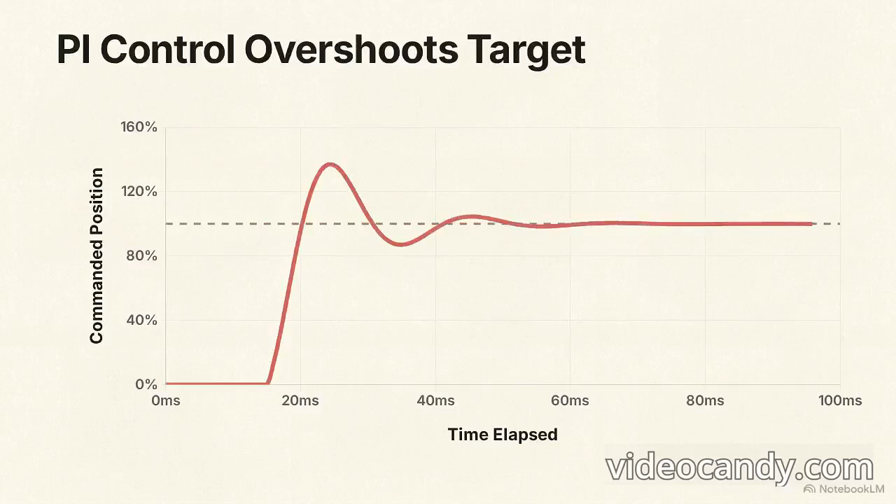When a high-speed robotic actuator is commanded to stop, standard proportional integral control typically causes the system to either overshoot its target or require time to settle. Achieving a sub-microsecond settling time, where the system snaps perfectly still without vibrating, is often considered a violation of physical control limits.

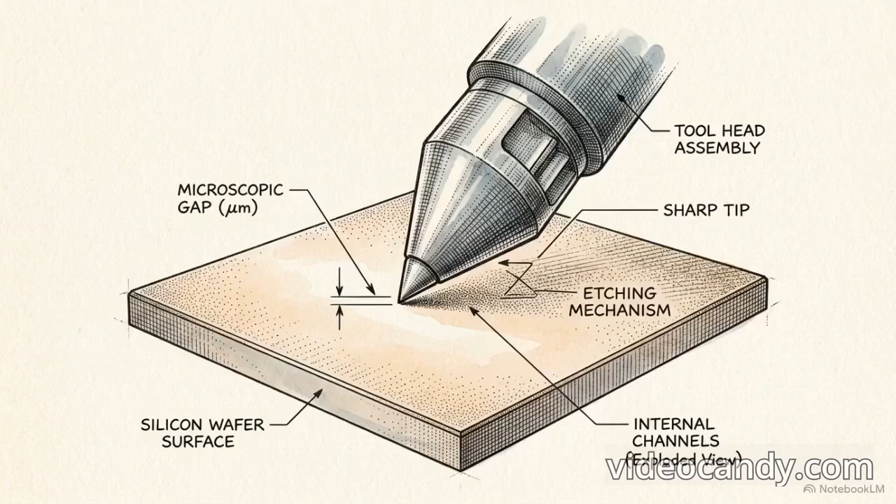By bypassing traditional digital sampling delays with predictive state observers, engineers can remove the phase lag barrier that restricts standard feedback loops. This architectural approach enables nanometer-scale precision in high-speed motion, reaching performance levels that traditional control models cannot support. High-speed motion control depends on an architecture where the system's software update cycles are physically locked to the hardware's pulse modulation frequency.

A baseline standard closed-loop vector control system operates by measuring errors and applying corrective forces. No matter how well-tuned this reactive loop is, it inevitably hits a physical performance ceiling, dictated by the absolute lower bound on sample rates. A system's sample rate must be at least twice the bandwidth of its reference inputs, and to effectively suppress random physical noise, the sample period should be 10 times shorter than the noise correlation time.

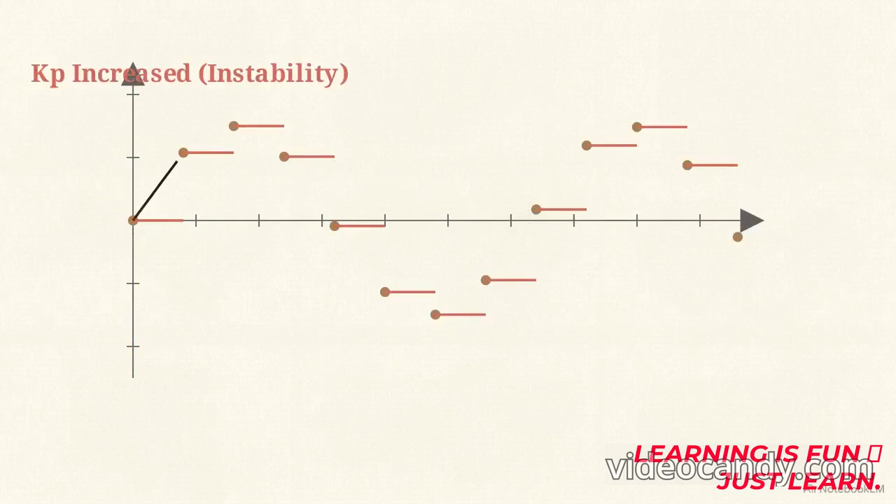If an engineer attempts to compensate for this delay by increasing the proportional gain, or KP, the system becomes unstable because its heavy control actions are reacting to outdated sensor data.

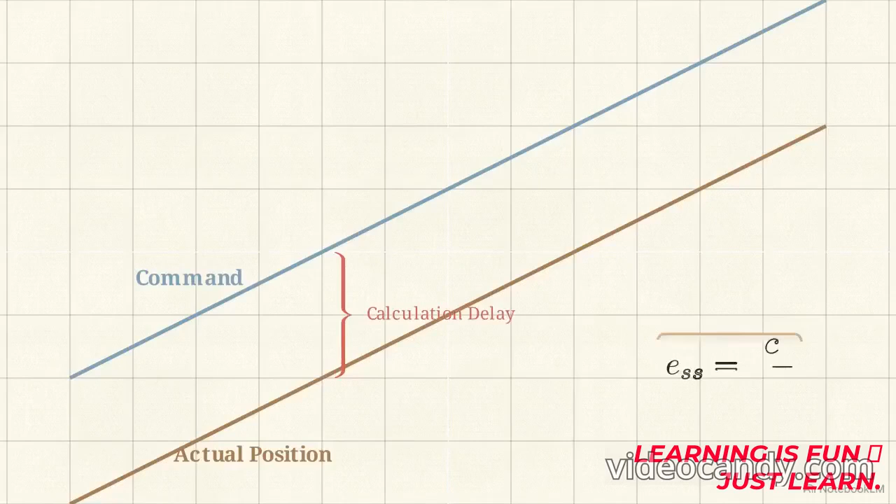In setpoint control, tracking a moving reference means this calculation delay creates a permanent gap between the desired and actual position. The steady-state error, represented here by the formula ESS equals C over KP, remains strictly non-zero, forcing the joint position to constantly lag behind the command.

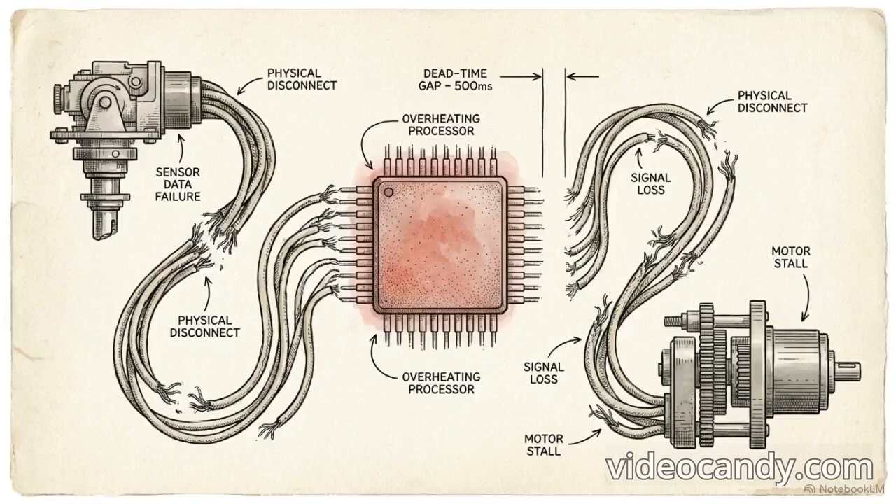Installing a faster processor does not solve this issue. A higher clock speed performs the math faster, but it does not eliminate the dead time gap between reading a sensor and outputting a physical voltage. As long as a control architecture reacts strictly to past errors, it is mathematically bound to suffer from high-speed phase lag.

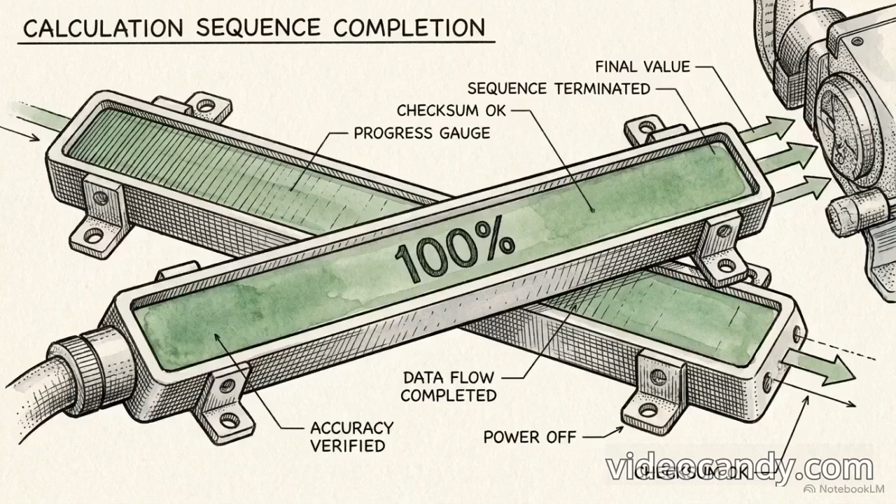To eliminate this lag, the engineering approach must shift from reactive proportional integral error tracking to proactive feed-forward nonlinear control. Feed-forward architectures allow the drive system to utilize a complex dynamic model of the motor's behavior, generating control laws without requiring time-consuming computations to run strictly at the servo rate.

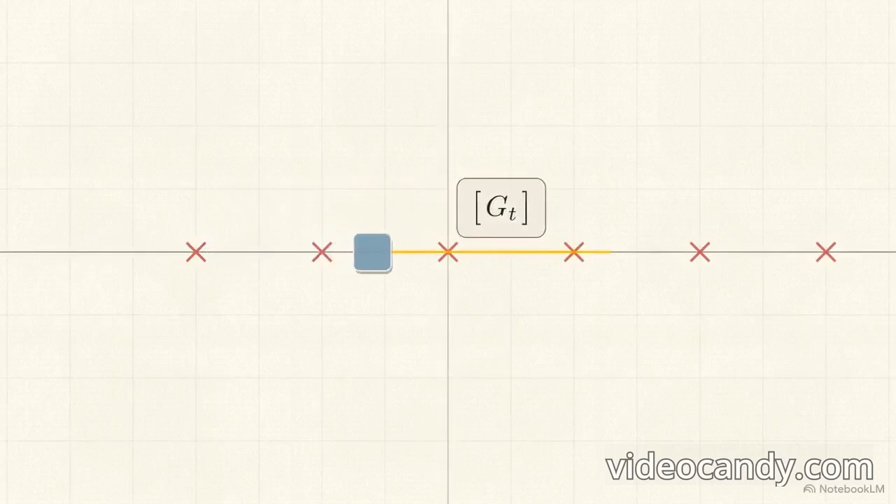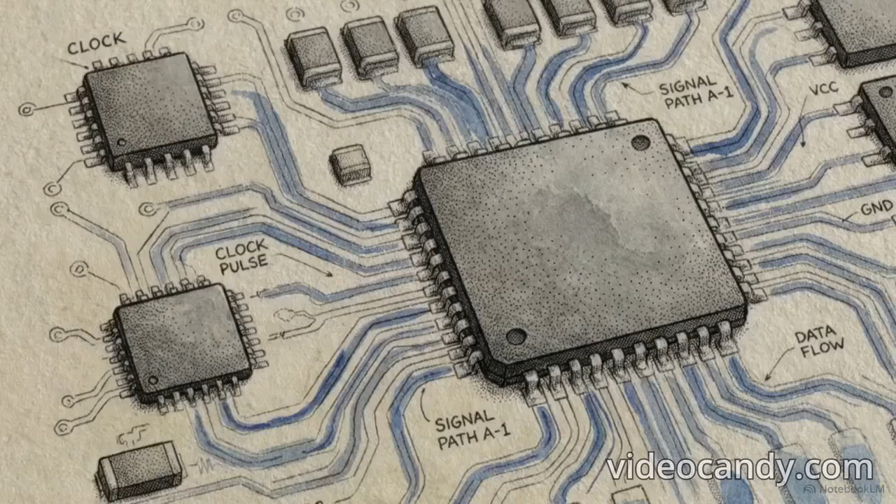An observer actively generates a future trajectory ahead of a moving target, calculating state prediction using a Jacobian matrix, GT. This calculation happens before the actual measurement update, entirely bypassing the reactive blind spots of discrete sampling. By accurately predicting the future state mathematically, the system effectively deletes the calculation delay from the physical control loop.

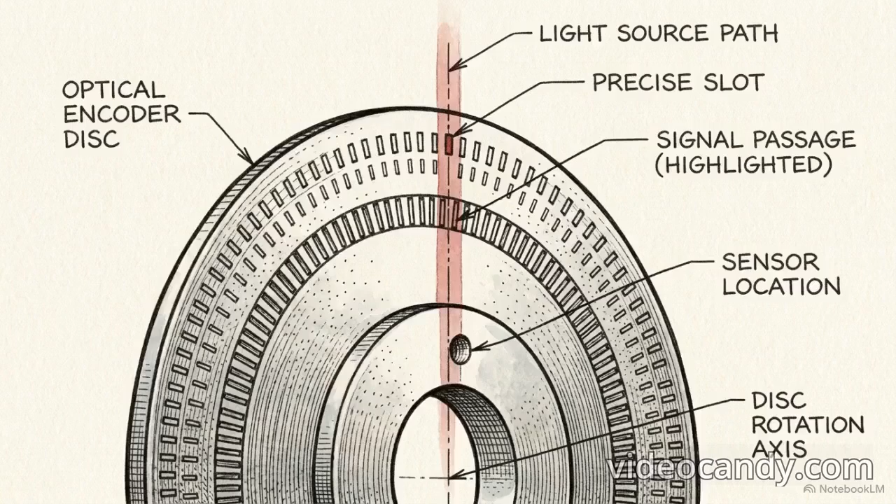Implementing predictive math requires a rigid hardware foundation. To eliminate timing jitter, high-frequency pulse width modulation duty cycles must be locked to ultra-precise hardware interrupts. The interrupt service routine must execute a precise sequence: read the encoder, calculate the new trajectory, and set the PWM output, all at a constant rate.

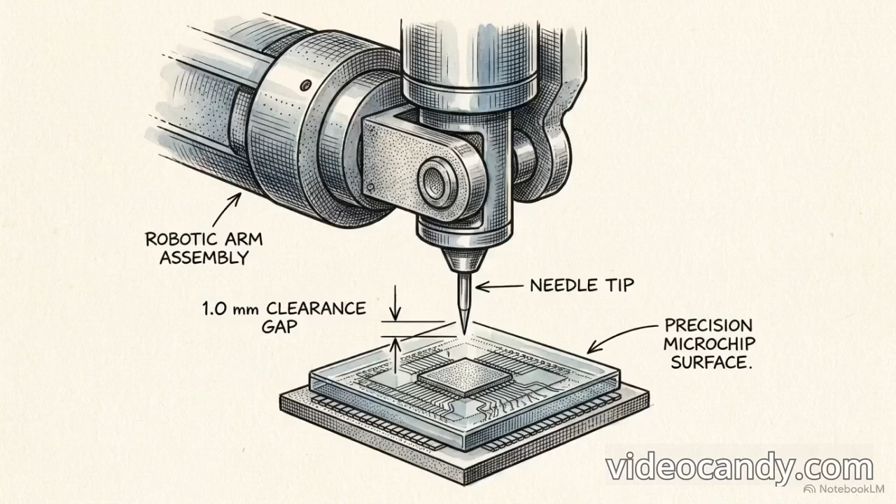The motor responds to this setup by acting as a linear amplifier, physically time averaging a high-resolution pulse width modulation that updates every 62.5 nanoseconds. This hardware-locked synchronization translates a mathematically perfect predictive model into flawless, zero-latency physical movement.

Hardware synchronization solves internal latency, but a perfectly synchronized loop will still fail if the load inertia shifts abruptly during operation. To maintain stability at high speeds, the drive requires real-time auto-gain tuning.

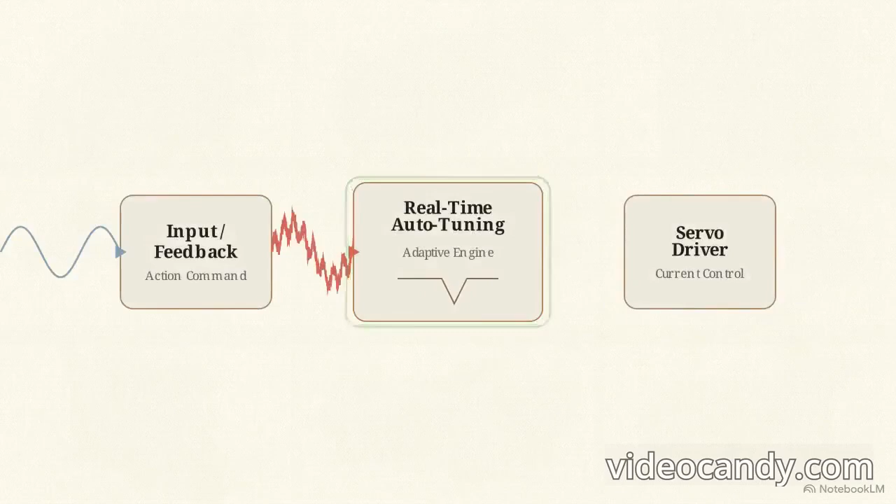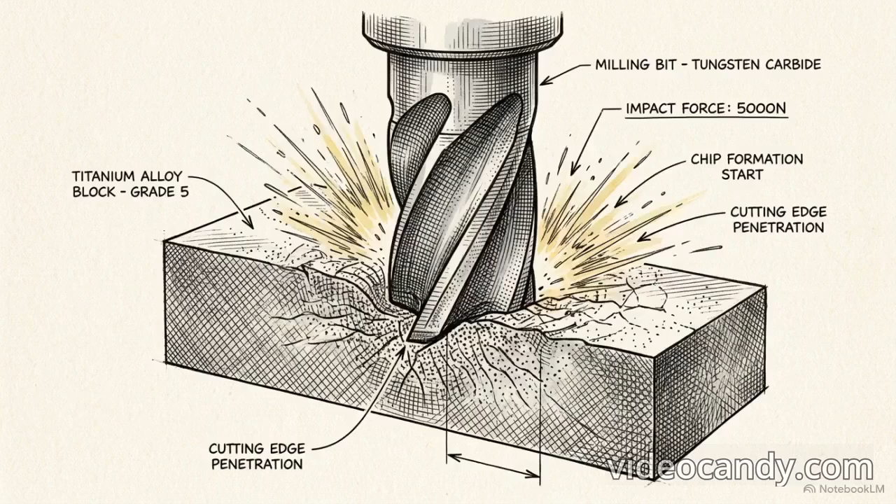This flowchart illustrates the tuning algorithm monitoring the motor. It estimates mechanical resonance and shifting load inertia on the fly, instantly adjusting an adaptive notch filter. This suppresses vibrations without interrupting the primary position and velocity control loop. Absolute stability at extreme speeds requires a system capable of dynamically measuring and adapting to its own changing physical mass in real time.

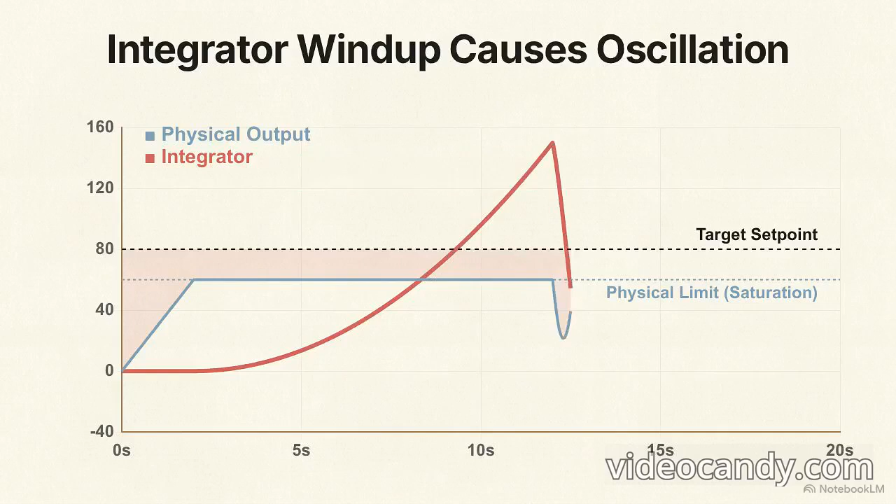Even with adaptive filtering, large step disturbances, like a tool head striking a solid object, can trigger a failure condition known as integral windup. When a massive following error occurs, the physical system output flatlines at its limit, but the mathematical integrator continues to endlessly accumulate error. When the system clears the disturbance, this bloated integrator violently unwinds, commanding overcorrections and massive mechanical oscillation.

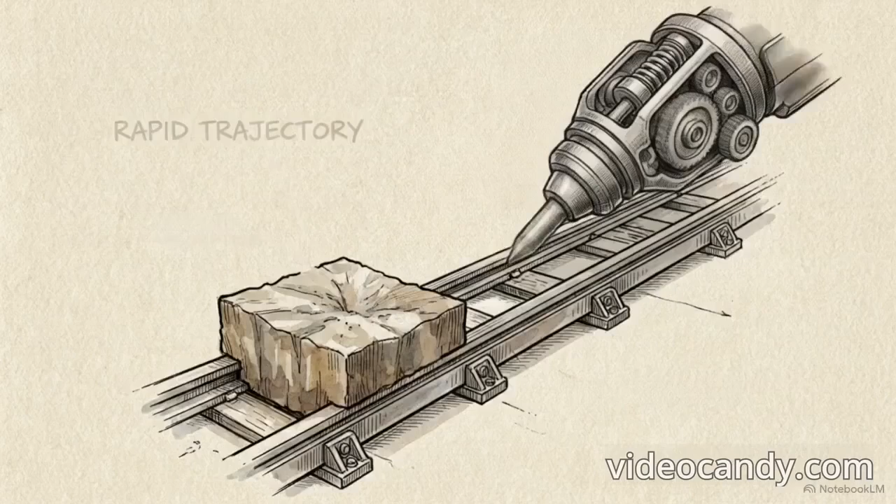The architectural fix for this is strict intervention. The PID implementation must explicitly stop the action of the integrator the exact millisecond output saturation is detected. By cutting off the integrator during physical saturation, the architecture guarantees a smooth recovery from sudden impacts, preventing the machine from destroying itself.

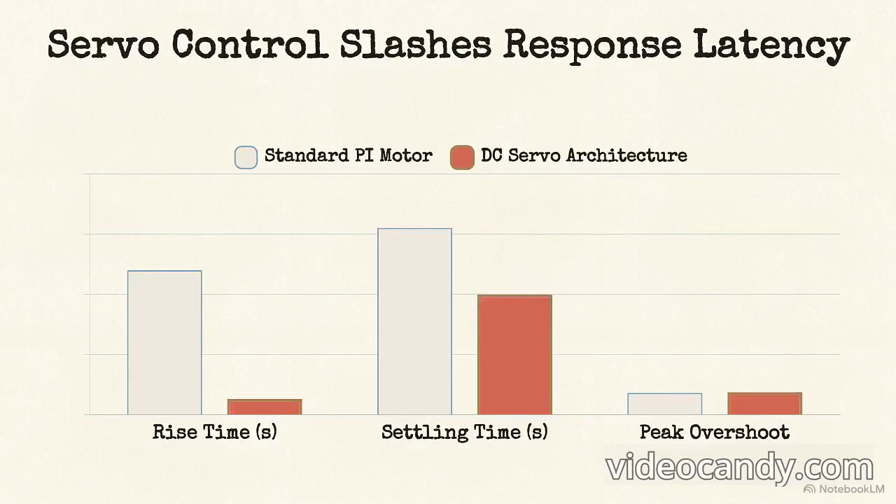This benchmark isolates the tangible results. Under heavy loads, a standard PI-controlled DC motor yields a sluggish 7.2-second rise time and requires 9.3 seconds to settle.

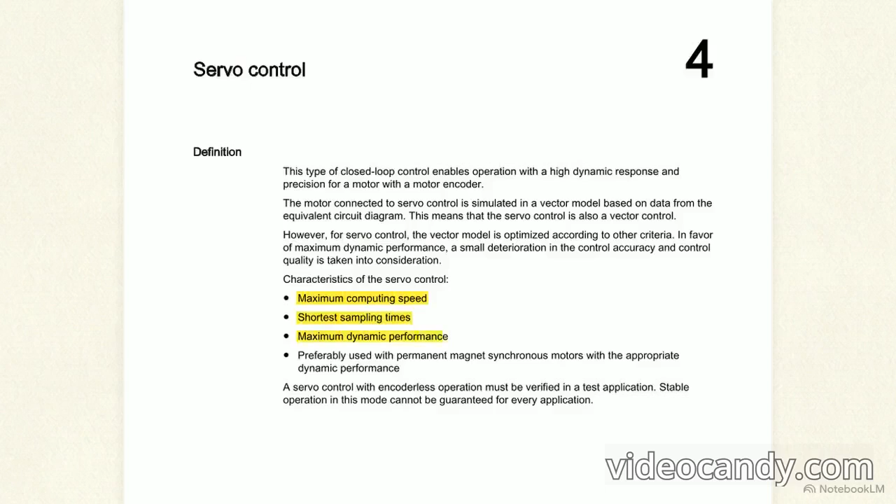Applying the DC servo architecture drops rise time to 0.8 seconds, shrinks settling time to 6.0 seconds, with a controlled peak overshoot of 1.22. Despite driving the hardware at extreme speeds, the predictive architecture successfully limits physical oscillations to a moderate, safe level.

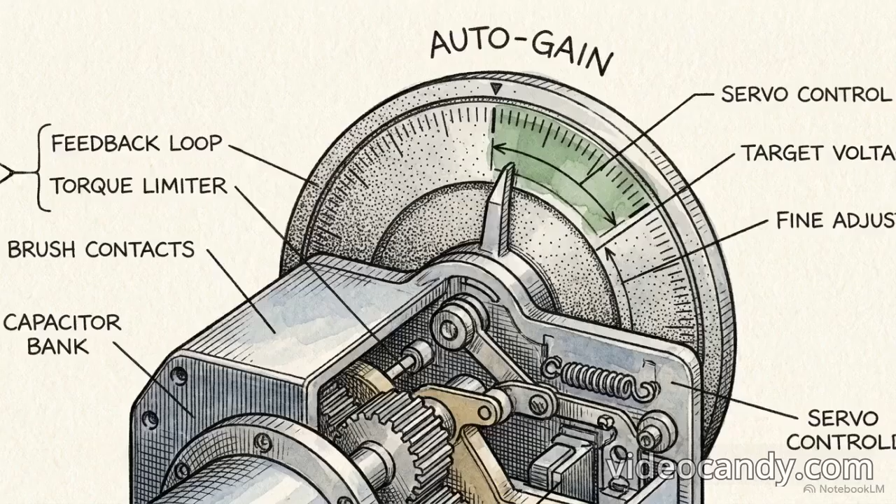These specific metrics, maximum computing speed, the absolute shortest sampling times, and extreme dynamic performance, are the definitive physical hallmarks of true servo control. The benchmark data proves that tightly synchronized predictive loop architectures possess a clear physical superiority over standard reactive loops.

High-speed motion control relies on three pillars: proactive feed-forward state estimation, absolute hardware-level PWM synchronization, and continuous real-time auto-tuning. Combining these elements allows engineers to completely bypass the theoretical phase lag limits of traditional digital sampling. Precision in high-speed motion control arises from the integration of temporal synchronization and predictive system modeling, surpassing the limits of raw calculation speed.